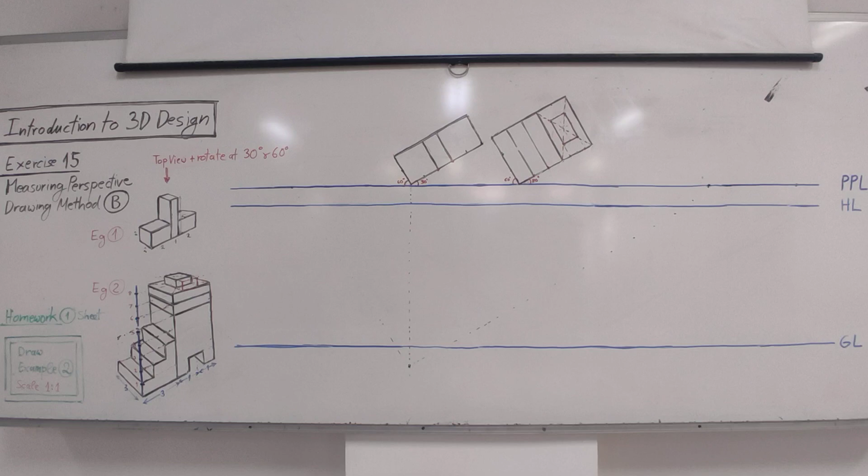Okay, so today we have exercise 15, measuring perspective, method B. Last time we explained method A, which was one of the methods that you use to draw two-point perspective in a highly accurate way. Okay? The measuring perspective method B is another method for drawing in two-point perspective, again, to get a very highly accurate result.

Now, we have two different methods. Both of them are excellent. Both of them can be used to draw the same type of drawings. However, sometimes you prefer one method over another because it's faster, or for example, the teacher asks you for a specific method, or sometimes, depending on the type of drawing, it is easier to draw with one method rather than the other. But both methods can be used for the same type of drawings, and both of them are, as I said, excellent. Give excellent accuracy. Okay? So, both of them are highly important in drawing.

Okay? Today, I will draw two examples. First, I will draw this one, which is more simple, to show you the steps, because with these methods, like method A, we have a specific way of constructing the drawing before we actually start drawing. And this is very important to explain. And then I will draw the two examples, one very simple and the other one also simple, but a little bit more complicated. And we will see how this works.

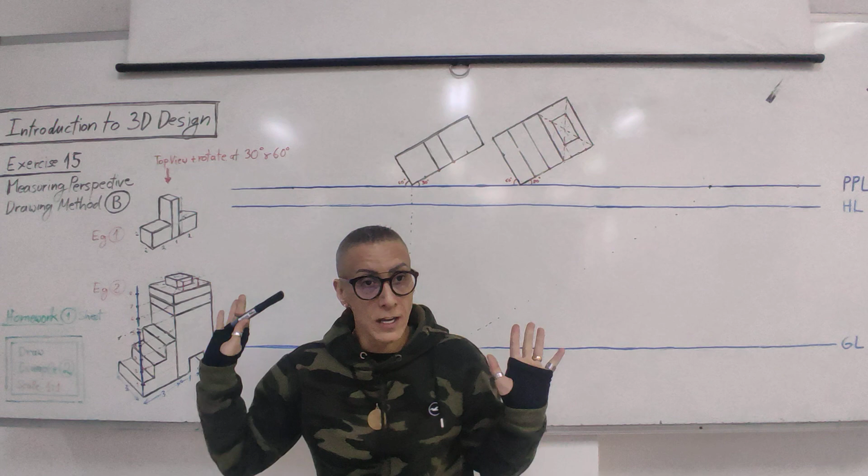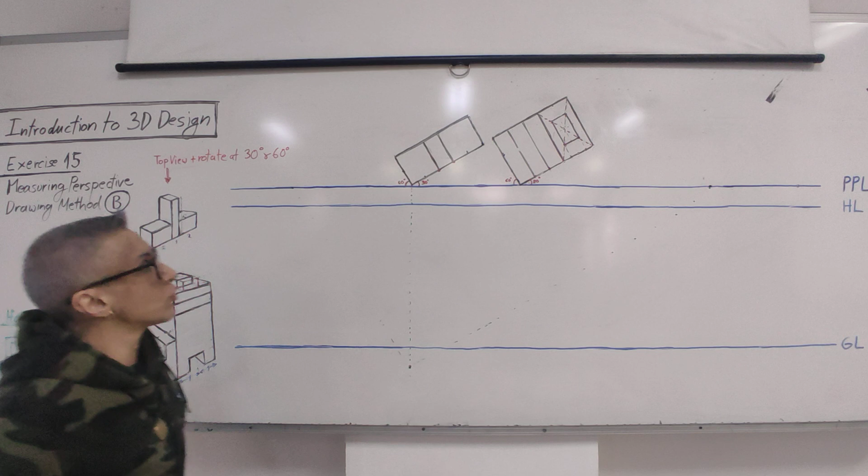Okay. Now, in this method, before I do anything, I need to draw a line called the picture plane line. The first line here, picture plane line. Okay, this is my first step. Then, above the picture plane line, I need to draw whatever object I'm drawing as a top view. Now, first of all here, ignore this one for now, okay? I will draw this first, which is this object. So don't look at this, later I will explain about this. So this object here, we need to draw as a top view and take the top view and rotate it at 60 degree and 30 degree.

Now, this 60 and 30 degree, they can be the other way around. I can put 60 here, 30 here, okay? What will happen is, where I have the 30 degree, because it's less, I will see more of this side. Now, if I put here 60, it will be shifted that way, and I will see more of this side and less of this side. But in this case, because I have here a longer object and here a shorter, I want to show here more. So this is correct and this is correct. It doesn't matter what you put. It depends on what angle you want to show the object. Okay? So 60 here, 30 here is fine. 60 or 30 here, fine. Okay?

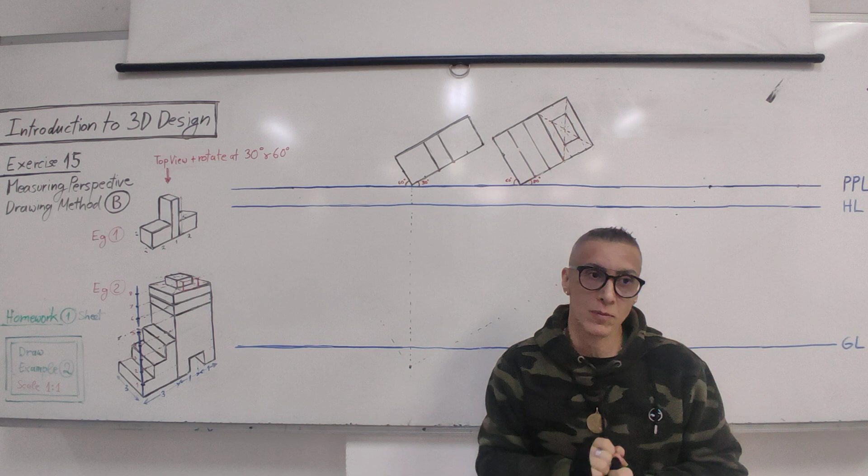The top view of the object needs to be drawn accurately. The top view must be accurate, and then you shift it according to the degrees. This top view must be drawn either with the actual measurements or the scaled measurements. So it depends on what is asked of you. If I tell you, draw this object at scale 1 to 1, it means you will take what you have here and put it on the drawing. If I tell you draw it at scale 1 to 5, you have to reduce. Okay? So it depends what you are drawing. If it's a small object that fits into the paper, you don't need to use a scale. But if you're drawing a building, a very big object, you need to scale it down. Okay, we explained about these things before.

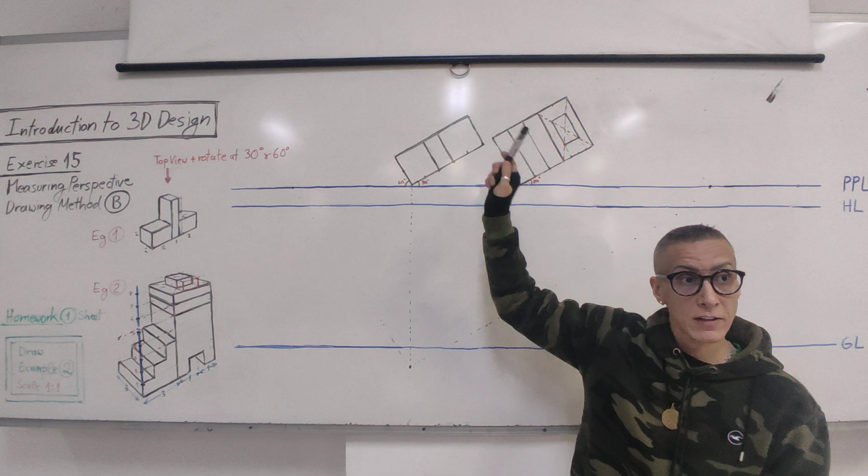So, in our case, we will use scale 1 to 1 in both drawings. So, what we have here, we will put here in the drawing. I already drew the top view, and I rotated the top view. Okay? So, we have here two cubes, 2 by 2 by 2 centimeter, and in the middle we have an object 1 centimeter by 5 centimeter high. Okay? So, as a top view, it will look like this, and rotated. Where is this located again? Above the line called the picture plane line.

Now, after I'm done with this stage, I need to find the station point. Like in method A, we have a station point here, okay? We need to locate it, and it should be at 90 degree again. Now, from this corner, the first corner, which should touch the picture plane line, which is this point here, okay? We will take a straight line down.

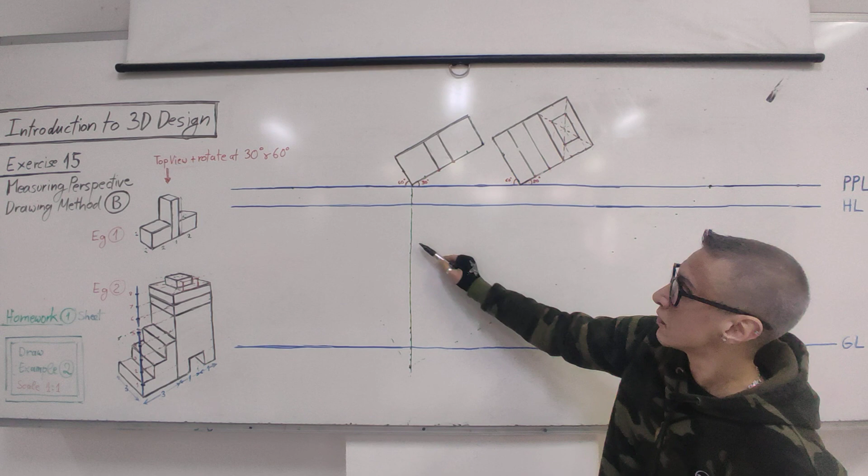Now, the station point can be at several areas. If I put it here, then I can follow this line, parallel lines at 90 degrees, or use my rulers, like last time, to find the 90 degree station point. However, with this method, you need to apply something additional. You need to measure from here.

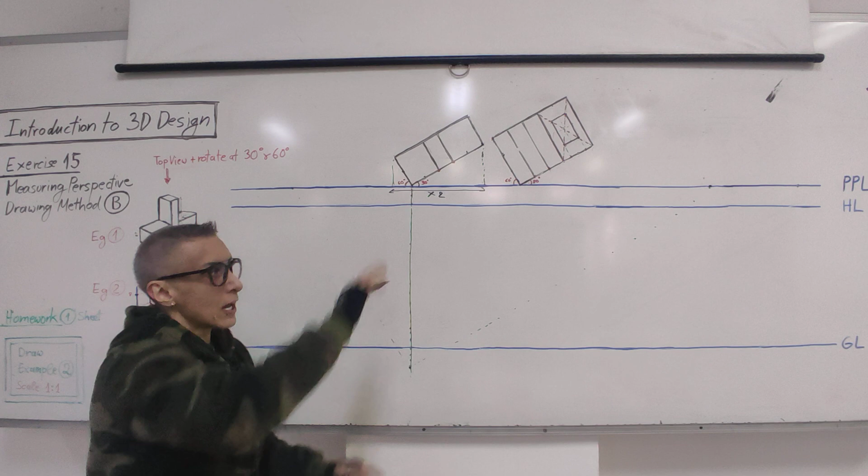So the object, this object, for example, if you put a line down until the picture plane line, and from here, straight line down, of course. So from here to here, how much is the distance? You put it here 2 times. So this distance times 2, and there is the station point. So you measure this distance, put it times 2, and put the station point location.

This is just to give you a very accurate drawing, so it doesn't create views that are not very nice looking if you put the station point at another location. So if we have this object, for example, the same thing. You put the points down and you measure the distance. Some objects can be long, short.

Just remember not to make a mistake. Don't measure this or this. Measure the distance when you put these lines down; this distance is important. So this distance times 2, we put the station point wherever it's located. And it should be located on this line.

Now, once we find the station point, we need to put the other 2 lines, which should be crossing each other at 90 degrees. So this line must be parallel to this line. This line must be parallel to this line. Or you can just use your rulers like last time.

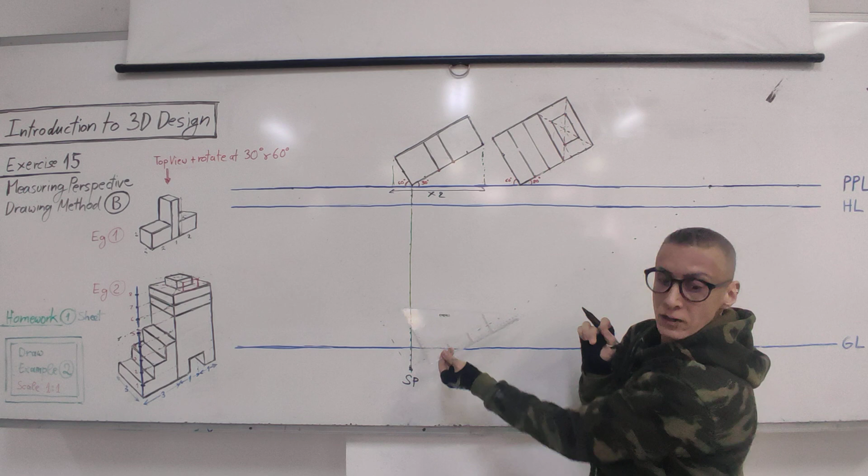So for example, here this must be parallel. This edge you can put it down, and you can go down to the station point. Continue this line. Or you can use this ruler again. Put it down wherever the station point is located, and then line, like this, or just make sure they are parallel to each other. So let me draw.

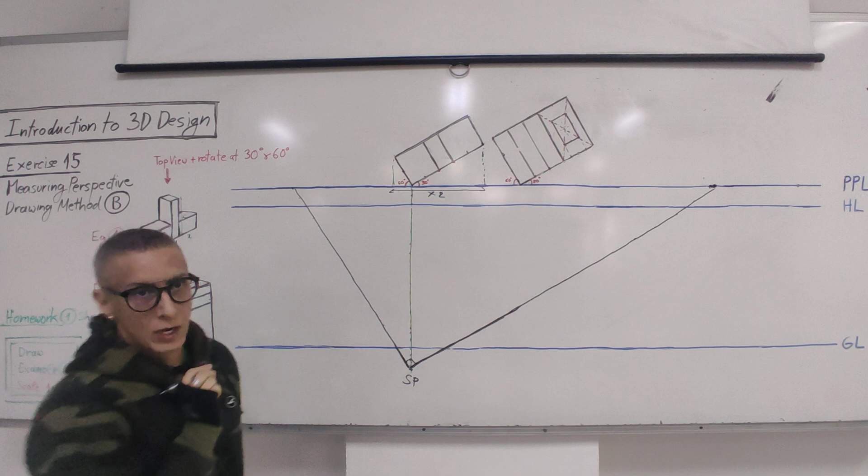So this should be what? At 90 degrees. And these lines parallel to these lines. Very important. Now, where these 2 lines cross the picture plane line, we will name this P1 and P2. Then, underneath the picture plane line, you need to draw a horizon line.

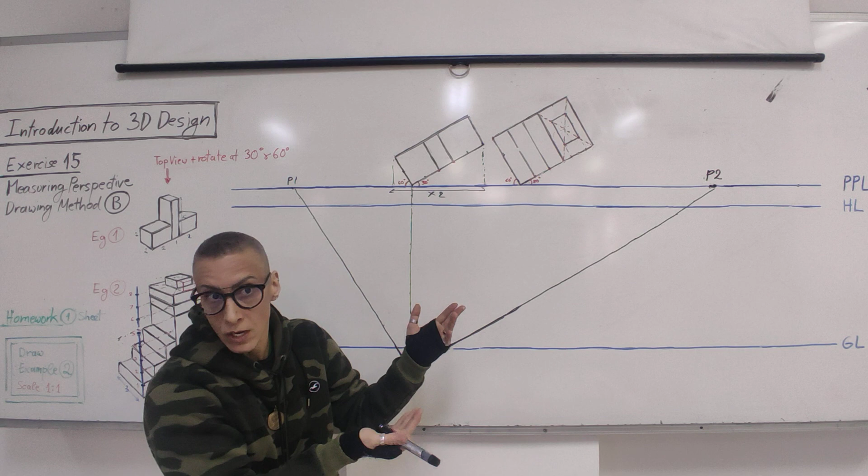Now, this horizon line doesn't have to be very close to the picture plane line, but you have to understand that where you place it will affect the drawing. Anywhere you place it, the drawing will be from a different angle of view. So the horizon line must be below somewhere, and then you will take from P1 a straight line down. This will be vanishing point 1, from here down to touch the horizon line. This is vanishing point 2.

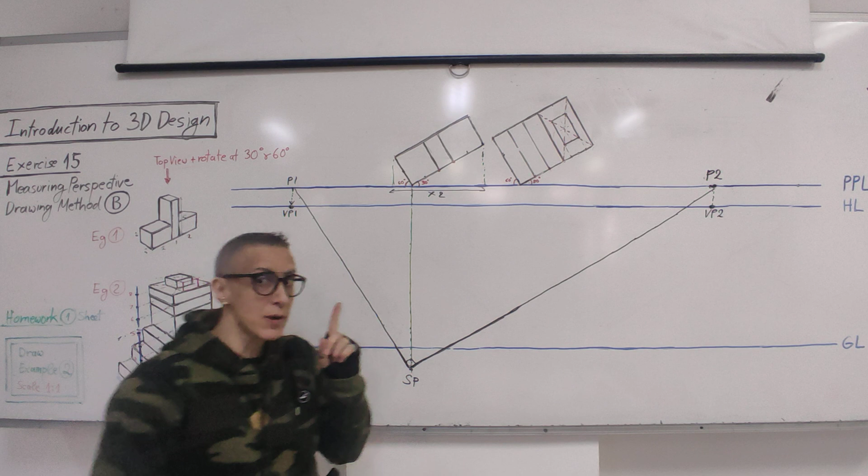Now, we need to also decide where the ground line is going to be located. Again, it can be located in several places. But remember what I said last time? When the ground line and the horizon line come close to each other, my angle of view will be different. So sometimes I might be looking down at it, sometimes up. It's not wrong. It's all correct, but it will affect the way the object looks.

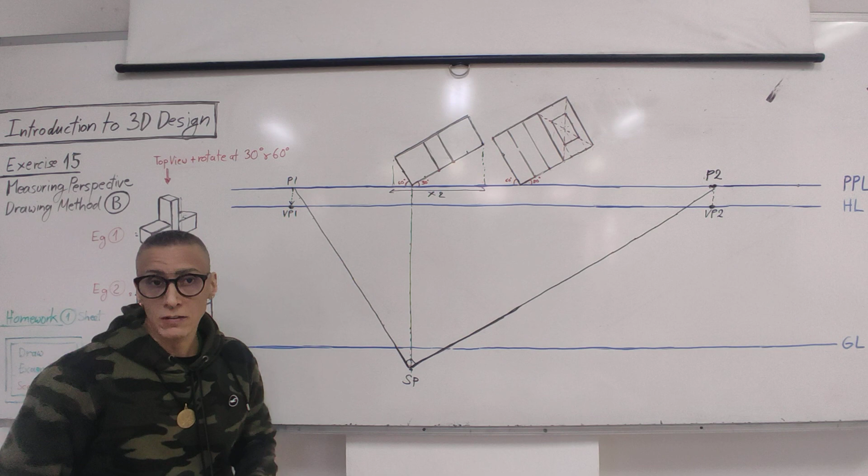Which is normal. So if you draw it somewhere and you don't like the way it looks, you can move it up or move it down and see what happens then. With the drawing, you have to experiment and then decide what you want to do. So we decide the ground line to be in this location. In this case, my horizon line is here. I have here sufficient space to draw.

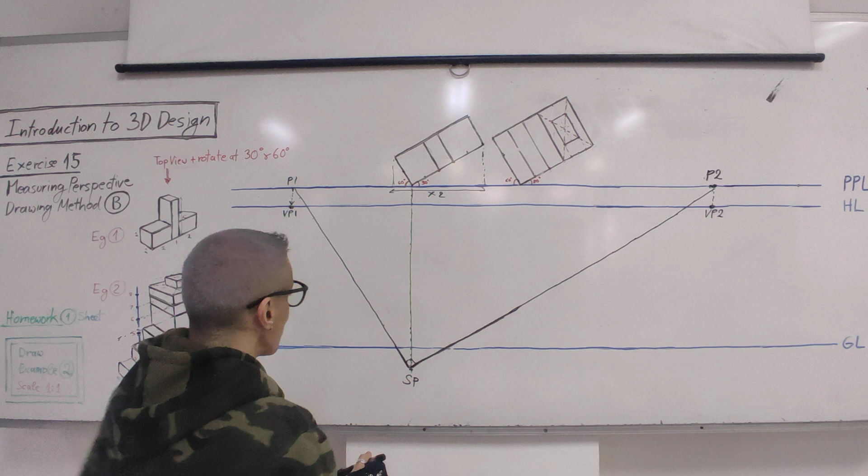And so, for example, if the object goes above the horizon line, part of it, you're looking up at it. But I'm going to try to draw the object as I'm looking down at it. So I need sufficient space here between the horizon and the ground line. Now, where the ground line crosses this edge here, this is the starting point, 0, like last time. And we will put some measurements on this line.

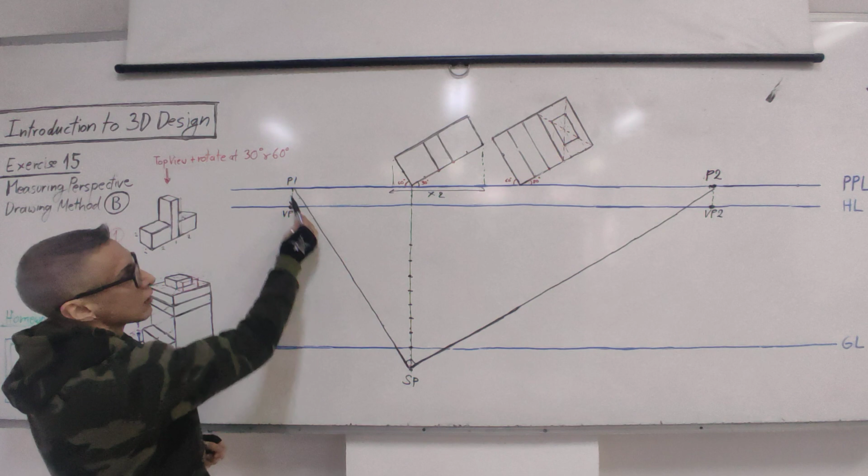So, some measurements that we will need. Now, from the starting point here, the 0, we will take these lines where? To the vanishing points. Be careful not to take it to the picture plane point. To the vanishing points. So, from this starting edge where the two lines cross, the ground line with this line.

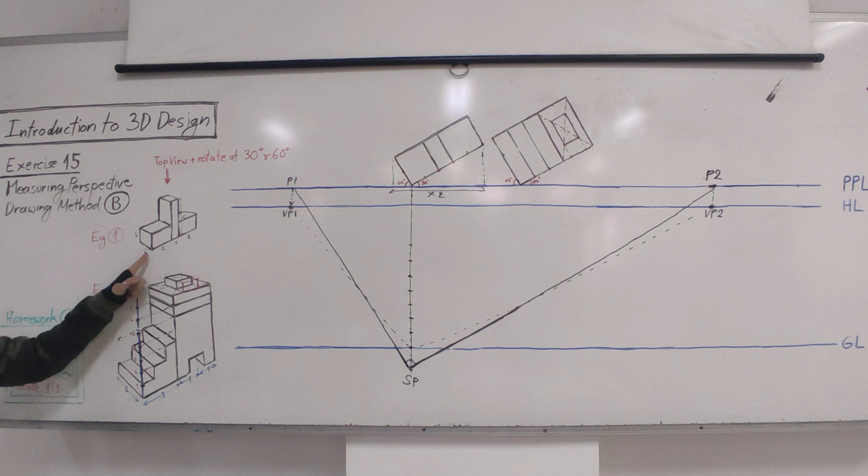Now, we are drawing this object. Remember, the first cube, the first edge here is 2 centimeters, 2 by 2 by 2. So, 1, 2, this is here number 2. So our first edge will be here, this one going to the vanishing point. Just 1 second. So at 2 centimeters, this will be the height. I can also take this immediately to the vanishing point.

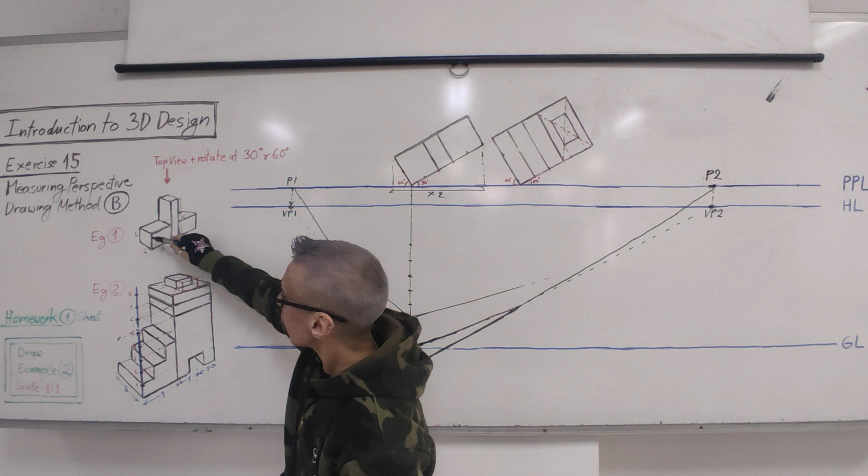Should go to the vanishing point. Okay, now, how do I find the location? Now this line, we already know it, but how do we find this line here, this line, and this line? Now, here is what is new about this method. So,

to find these, you need to look at the top view, and you need to look at the points where lines intersect. For example, this point here is this line. This point is this line, and this point is this line here, okay? So, we need to find the location of the points here, and also this point here. After that, it's very easy. We just put the lines up and continue the drawing. How do we do that, okay?

Something important. Now, we start always, because sometimes you might have a lot of lines that cross each other, a lot of points. You start always with the first 2 lines, these 2 lines. The main object points that are at the main lines, this line and this line. So, this, and this we need to find.

These we don't need to find, because once we find these, when we take the lines to the vanishing points, they will appear. This point here, we don't need it, because when I take this line to the vanishing point, this to the vanishing point here, they will cross, and this point will appear on its own, okay? So we always start at the front, and then we move back.

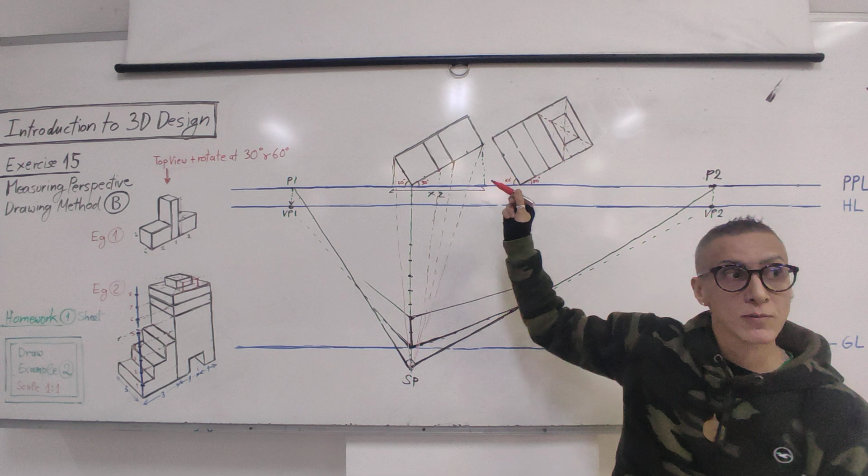So, all the points that you need to find, you will take them and put them exactly to meet at the station point. Now, look carefully and mark. Where do the lines intersect with the picture plane line? They intersect here, and here, and here, and here. Okay? This is very important. Now, to find this line, this is the point where it intersects the picture plane line. From here, I take a straight line down.

It must be straight. If you just use any ruler without a T-square, the line might become a little bit shifted, the drawing inaccurate. You must use the T-square and put the ruler on top. Make sure the lines you take down are perfectly straight. Any small mistake in this construction, because some of the lines are very close to each other, and some points can be ½ millimeter next to each other in some drawings. So if you make any mistake, the result here will also look wrong. Okay? So just be careful.

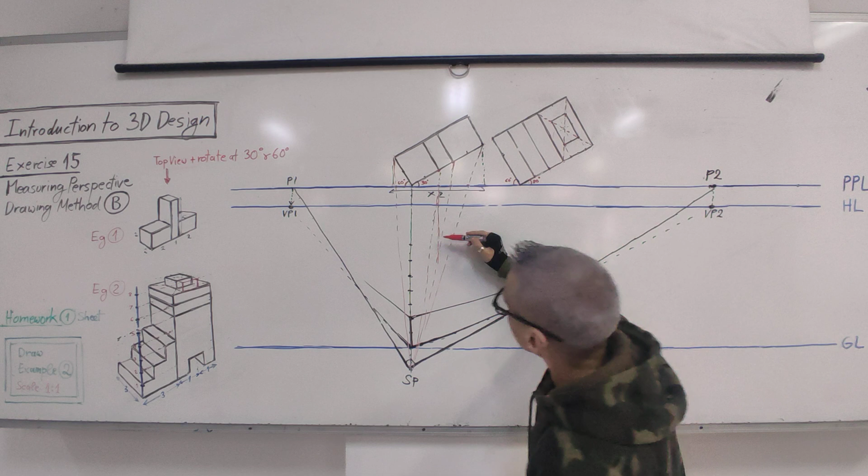So from this point here, where this point intersects the picture plane line, we take a straight line down. The straight line down, you see from this point? And this is basically the line we need here, where it crosses these two lines. Now the next one, this line, how do we find it? The same thing. We already found the point on the picture plane line. We put a straight line down. Okay, here is the line that we want.

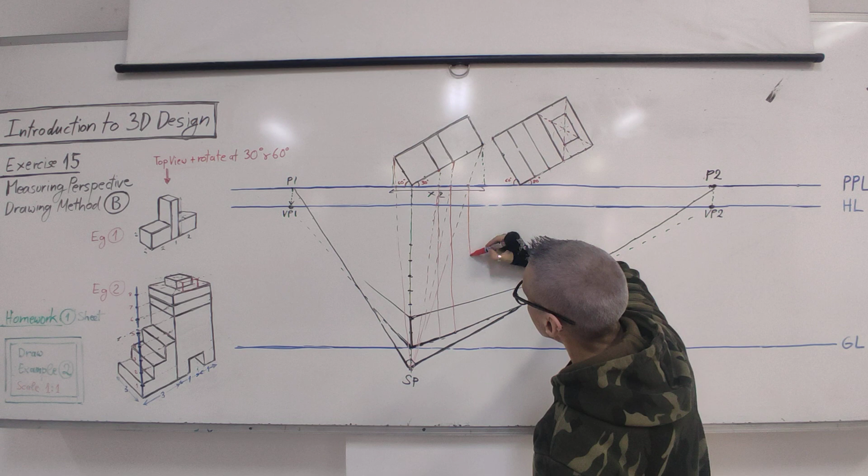The final line, this line, which is this one here, this point crosses the picture plane here. We put a straight line down. Here is the location. Now we're finding the location, later the heights, okay? We need now the location. So this is the location. We already have this cube here. This line we need, and this line we need.

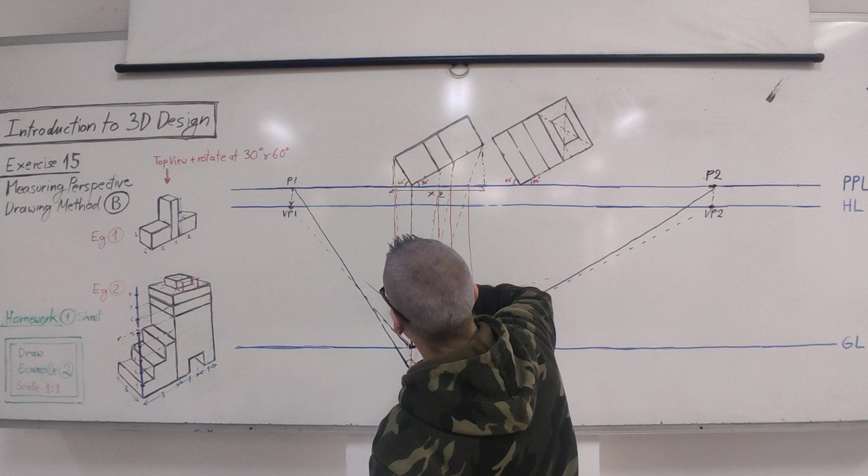Now, from this side, what happened, okay? Here the point crossed the picture plane, so I need to take a straight line down from here, until it crosses these two lines. And this is basically the other side of the cube that we need.

Now, to continue the drawing, we will take these 2 points to the vanishing points, okay? To the vanishing point. And this one to the vanishing point. Okay. Now, this is a 2 by 2 centimeter cube, 100% should be correct.

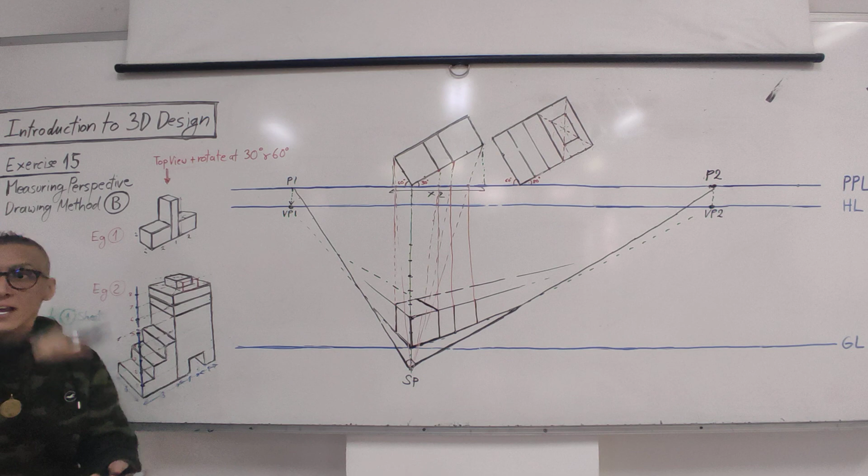Now, this object here is actually 5 centimeters high, okay? So how high to put it here? Well, we will extend the lines. We extend the lines up and we go back to the first edge. So 1, 2, 3, 4, 5. At number 5, we take to the vanishing point, where it will intersect these two lines. This is what we need.

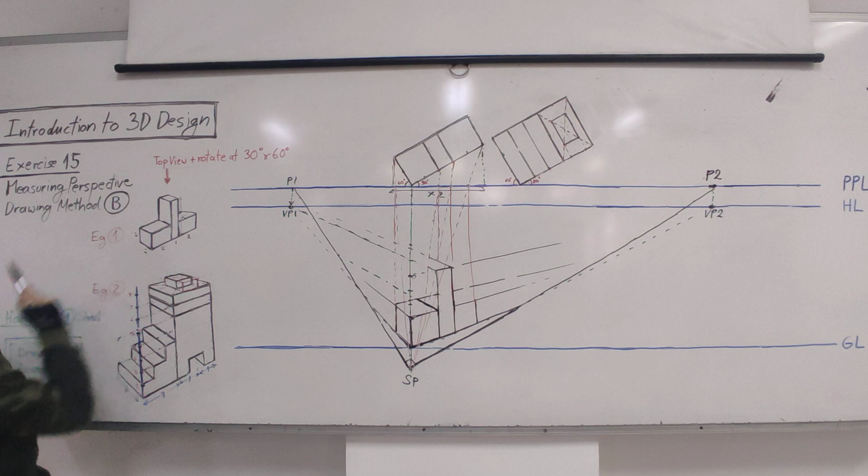Okay? Now, this here will be deleted. Now, from these 2 points to the other vanishing point. Now, this object ends where the cube ends. So until the end, here, meaning this corner. So I will put this line up.

So, where it will intersect this line, here is the location. From here, we will take to the other vanishing point, and this is basically the object that we need. Now this cube, we already located this face from this point to the vanishing point, to draw this side.

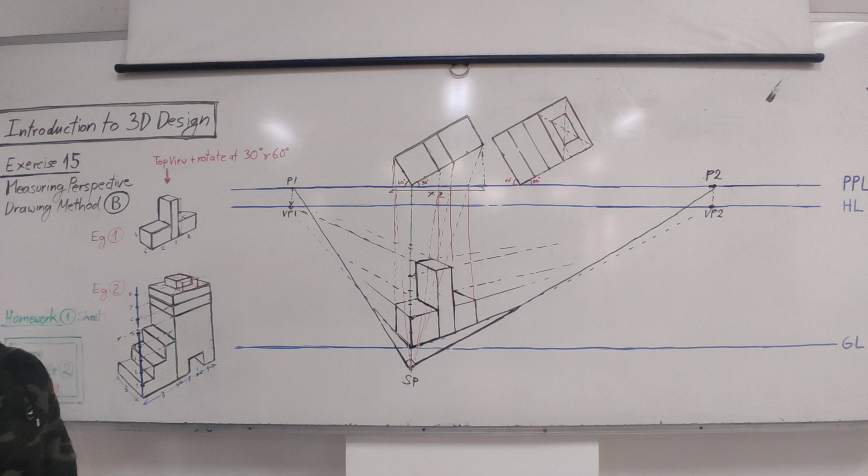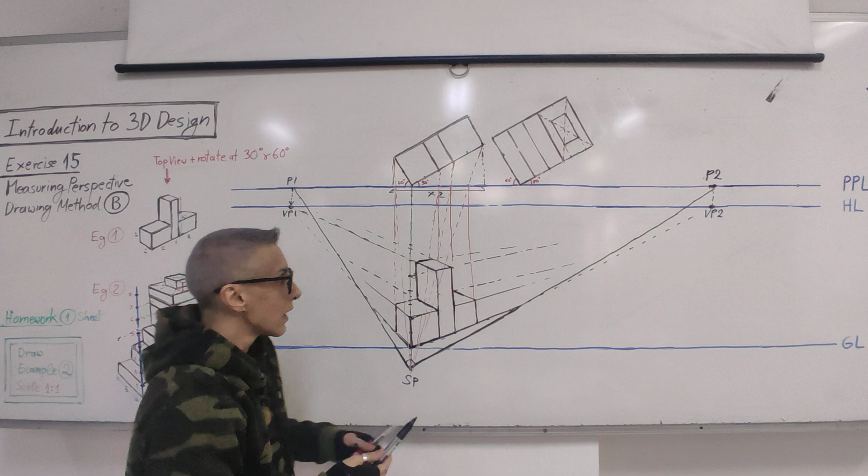And this is basically it for this drawing. We have in this type of drawing measurements on the first edge to find the heights, but all the other point locations we find from the top view, which is above the picture plane line, by connecting lines to the station point, seeing where they intersect the picture plane line, then putting straight lines down to see where they intersect these two lines, the base of the object. Then just take straight lines up. The rest is very easy.

So this is the first object. I will now delete everything and we will draw this object, because this object will have a different station point, a different location and measurements, and the vanishing points will all be in a different location. So I will delete everything now.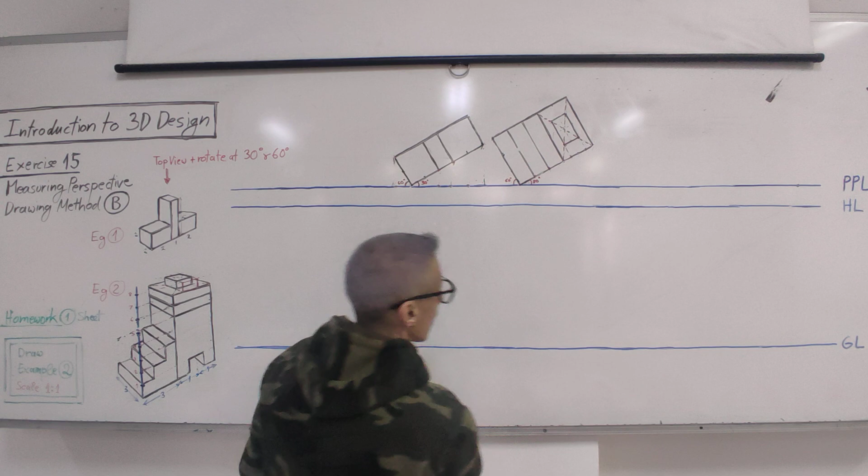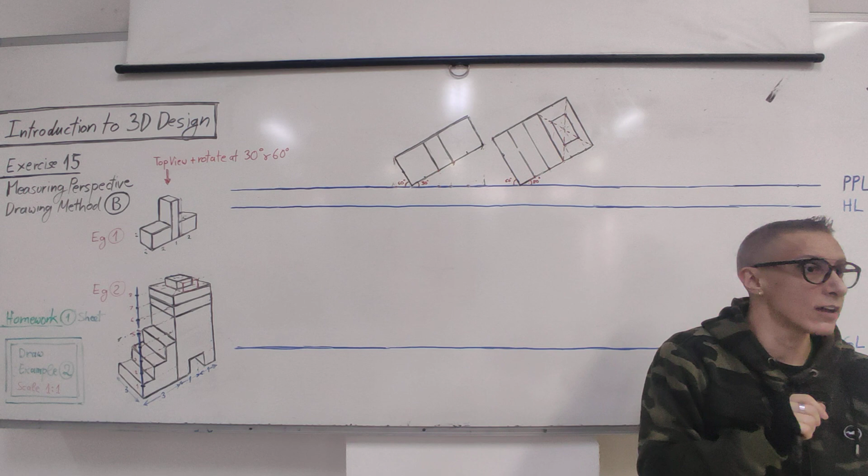Now we have this object. Again, we need to draw its top view accurately according to scale or real measurements, and then take the top view and rotate it at either 30-60 or 60-30, depending on which side you want to show more. So this is the top view of this.

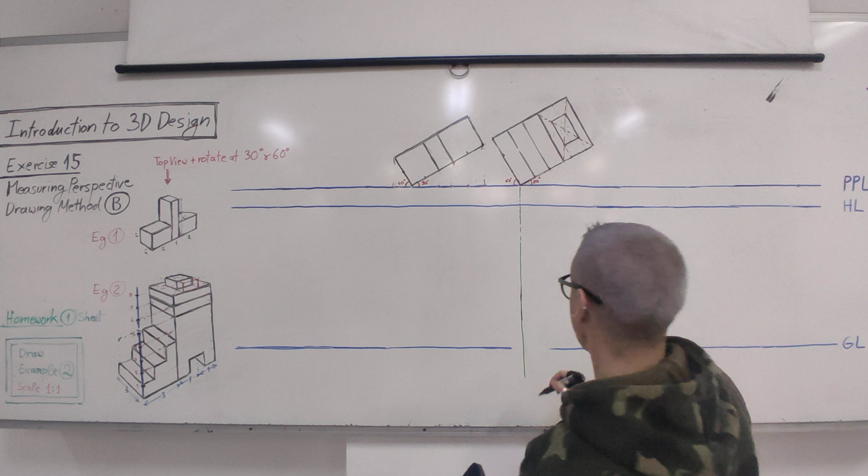Now, from this corner that touches the picture plane line, again we will put a straight line down. So we put a straight line down.

We need to find the station point, where again we will take the distance from the two widest points. But to do that correctly, we need to draw straight lines down until the picture plane line. Measure this distance and make it times 2. So this distance you take, you put it here 1 time, 2 times. Wherever it reaches, this is the station point.

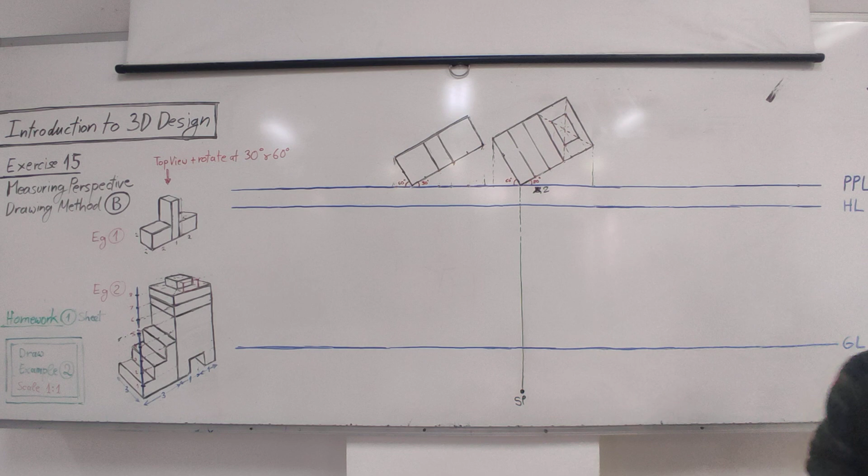Now the next step is to find the 90-degree intersecting line. So this line must be parallel to this line, which must be parallel to this line. You can use the rulers to help you in this. Make sure this is parallel to this, not like this - like this. And you can put it down until you reach the station point.

And then just continue with the lines, until you touch the picture plane line.

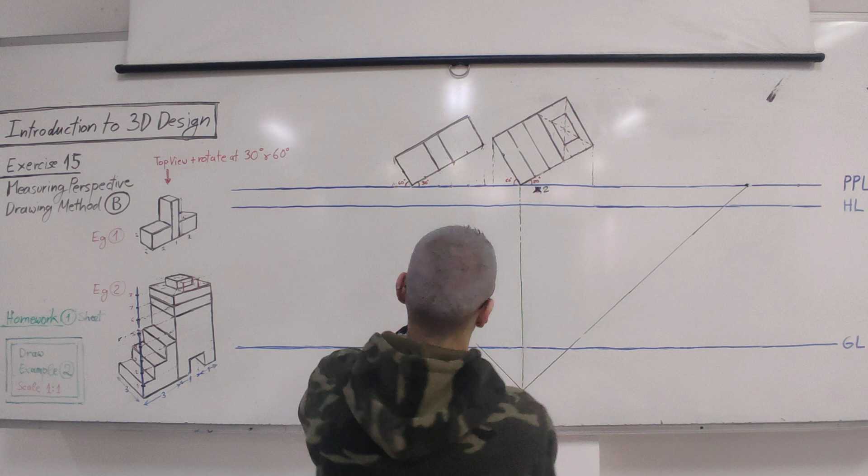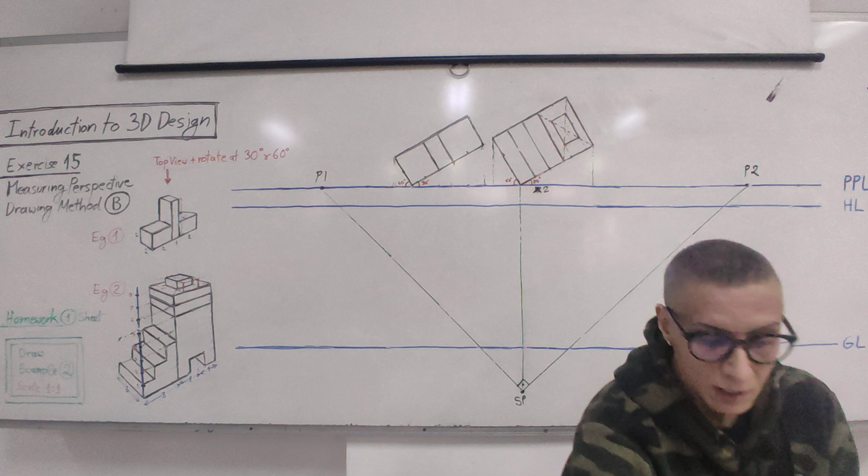So this will be P1, this will be P2, this will be at 90 degrees. Remember, if you use this ruler, it will be exactly in the middle. But you can also use this ruler - then the 2 points, one will be far away, the other one will be closer, and you can rotate it from this way also. Important that this be 90 degrees.

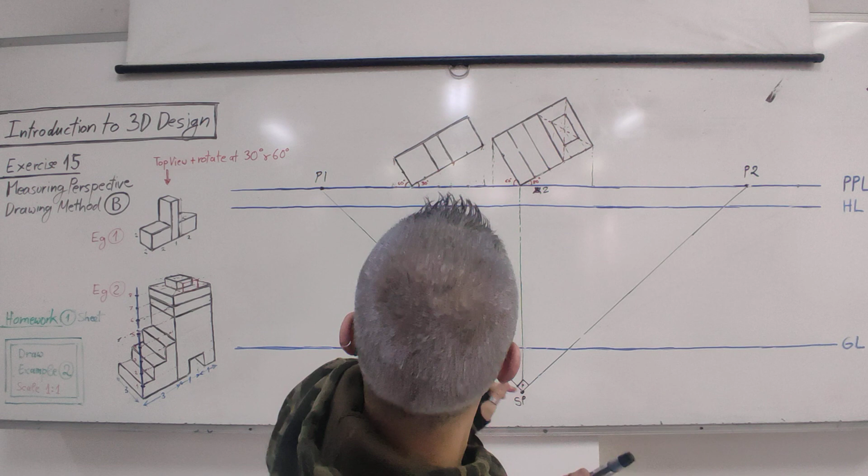Now, this drawing is not very accurate - it's just a visual, because this line and this line need to be parallel actually. So in fact this one is parallel. I cannot use this ruler, I have to use this ruler because I have 30, 60 degree here. So let me fix this point here, just to make it a little more accurate.

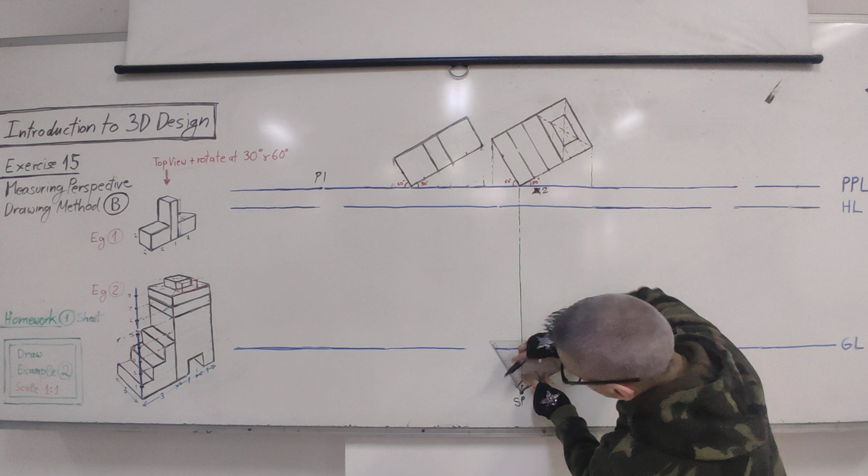So this one here. Let me remove this one as well. You can use only this ruler for this drawing because we have 30-60 or 30-60 here. So I will do it again using this ruler. Put it here, this one on the line, put it down until our station point. Then put the line. So now they should be parallel to each other.

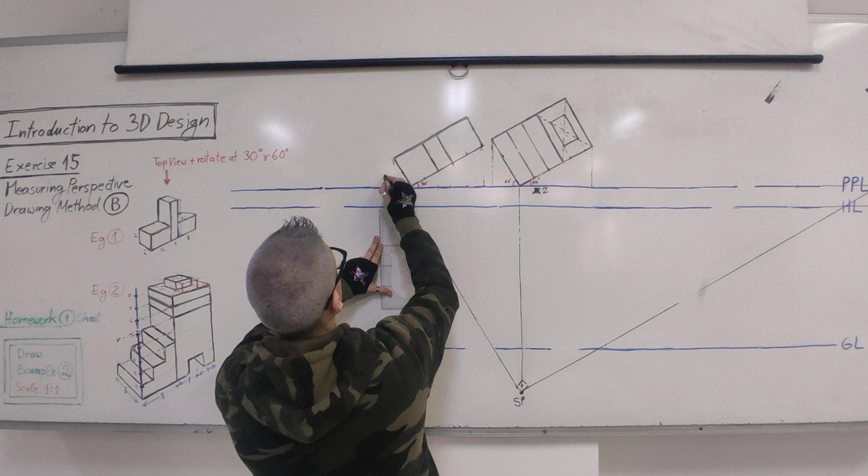I will just use the ruler because these are very long lines and not to make them all shaky. So P1 will be here, P2 will be here.

So this distance times 2, this is the station point, this is a 90 degree. This line parallel to this line parallel to this line.

Now what do we do? We have the ground line selected. I will use the same ground line location. This is our ground line. It crosses this line at this point, so this is here the 0 - the starting point for this point, the starting edge.

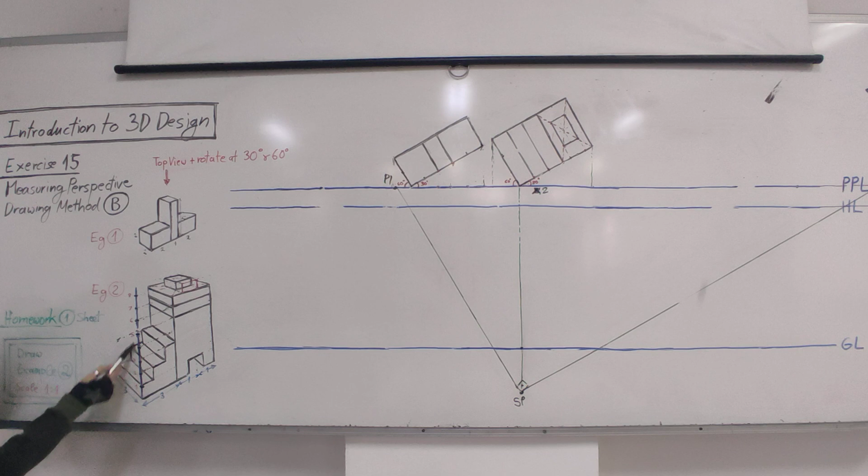So what do we have here? This is the starting edge. So we have 1 centimeter here, stairs, 1 centimeter, then another one, then another one. So the first one is 1 centimeter. Let me put a ruler first - 1, 2. So at 1 centimeter, we take from here and from here to the vanishing points.

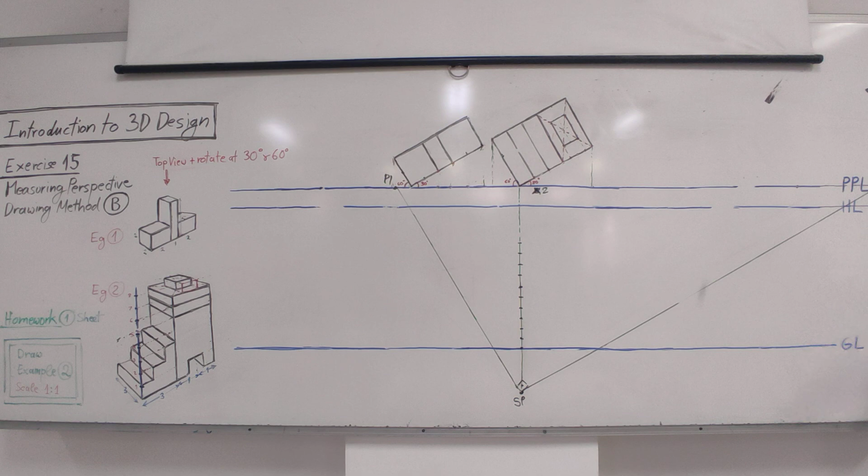To the vanishing points - where are our vanishing points? We need to put them down, down here until the horizon line. So this is our VP1, this is VP2. Be careful not to connect to the picture plane point - to the vanishing point. So from the first edge we take to the vanishing point.

The vanishing point. Okay.

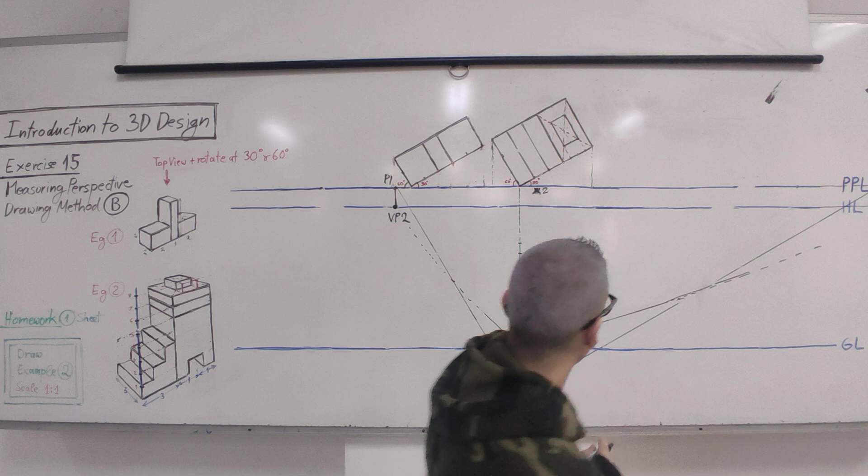So they should go and reach the vanishing points, and we said that the first object ends at 1 centimeter. So this is 1 centimeter, so from here also to the vanishing point we take, and from here to the other vanishing point. Okay, continue.

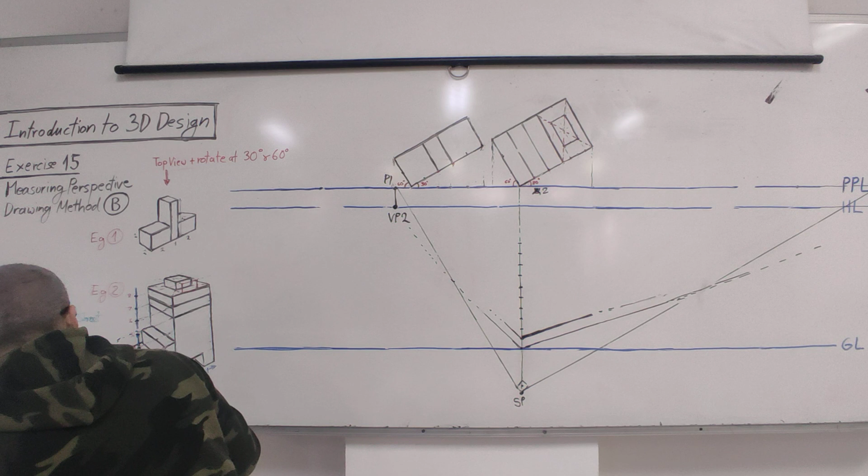Now, from this point, we took this line here to the vanishing point, and we took this line to the vanishing point. Okay, great. How do I find this line here? This line, this line, this line, this line, and these two lines. So we need to find their location here on the bottom part, on the ground.

We need to find it, not in the air, here. So if we put straight lines down here, straight line down from here, so this point, this point, this point, this, and this we need to find. From where? Using the method that we just explained. Where are they located here, these points? Here, here, here, here, here, here. These 2 points are for the opening, okay?

So you need to make sure that exactly the measurements are correct here of the top view. Any mistake here, everything will be wrong. So from this point, which is this point here, you take where? To the station point. So I will take all of them to the station point now, and later find their location.

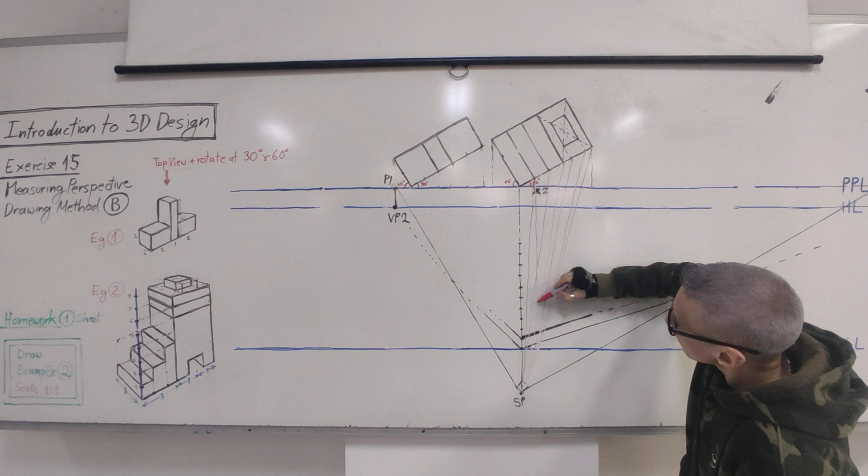Or I will just do it freehand. So I will put a straight line down. Where it will intersect this here, this is what we need. Then the next one. Oh sorry, this one here. Be careful not to, by accident, take from this point. From this point, you need to take down. So located here, from this point down.

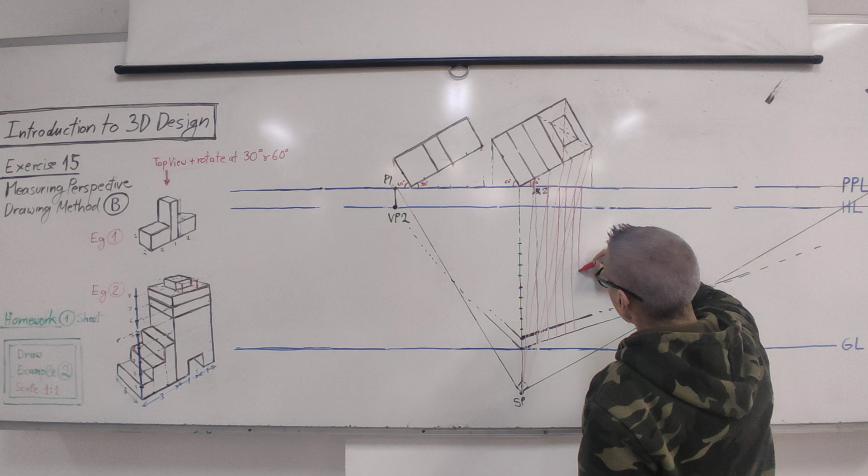So, once you have this top view and the measurements are correct, just you find the points. You don't measure anything else. You just find the points to the station point. Then where they cross the picture plane line down, automatically the object will be correct.

Now what we have here, we find the location. So we found where this point is located here, this point, this here, this, and this. Now here we don't have a line, so we need to put it up. So we don't need this line, but for now we will leave it.

Now this line is at another 1 centimeter. Here we started with this is 1 centimeter, then we have the stair, this one is also 1 centimeter, but from where do we know? From the first line. So this is here 1. At number 2, you take to the vanishing point. So you take here to the vanishing point. Okay, this is what you need.

Now, from here you have another stair up. So we found now which one? This and this line and this line. This we need to find, this point. This comes at number 3. It's the third one. Okay, so 1, 2, 3.

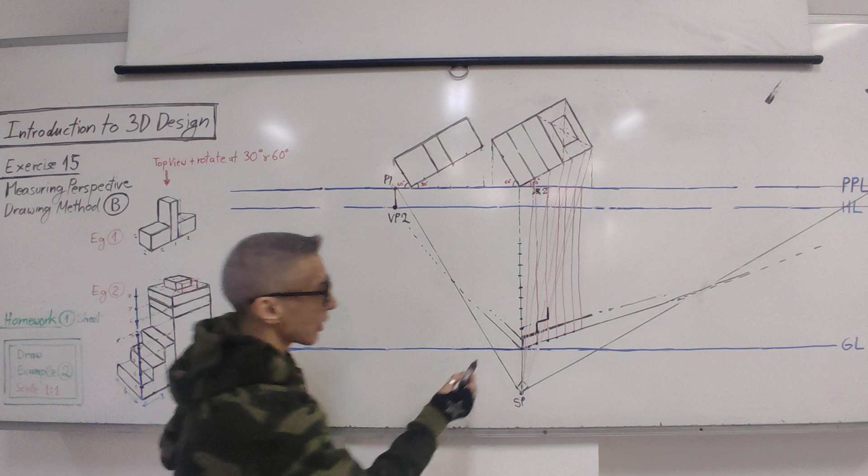From number 3 to the vanishing point, where it will intersect here, to the vanishing point. This is the line we need. Until where? Until this line, okay?

Okay, now we put up again. The next will be what? The next will be this line, up, the long one. Now the long one is how much? 7 centimeter. From here we need to count. 1, 2, 3, 4, 5, 6, 7. So from number 7, we take to the vanishing point.

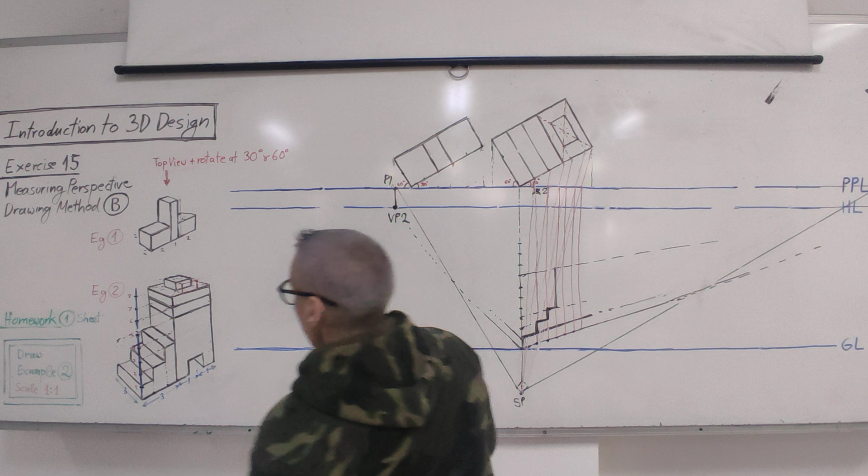To the vanishing point, and we put this line up. Later I will draw this detail. Now the final line, which is this line here, this point, I will put it up. Now, from number 7, this line that we already go to the vanishing point, it will intersect these two lines here. So let me remove these so we don't need them here.

To reduce the number of lines. Now we need to take from each of these points to the other vanishing point to continue this side of the object. So this line we already have it. This line we already have it. But okay, we have a problem. Where does this end here?

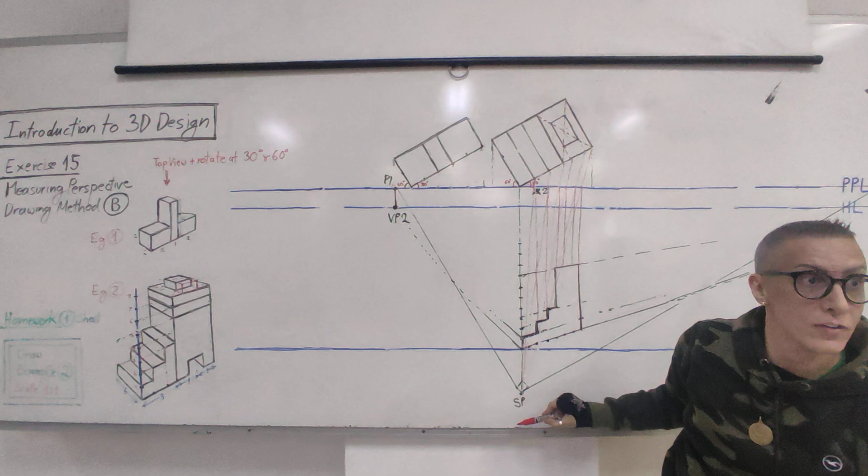Okay, so we need to find this point. This point. We still haven't found it, so we take this to where? To the station point, okay? To the station point.

Okay, now where this intersects the picture plane line, from here we will put a straight line down. Straight line down. Until it intersects these two lines. This is what we need here.

Now, from here, okay, we continue. From here to the vanishing point again. From here to the vanishing point, to the vanishing point, to the vanishing point, all of them to the vanishing point.

Now, from here to the other vanishing point, to see where this will intersect. Where they will intersect, you put it up. Here to the vanishing point. Where it will intersect, you put it up. Then, from here to the vanishing point, where it will intersect, you put it up.

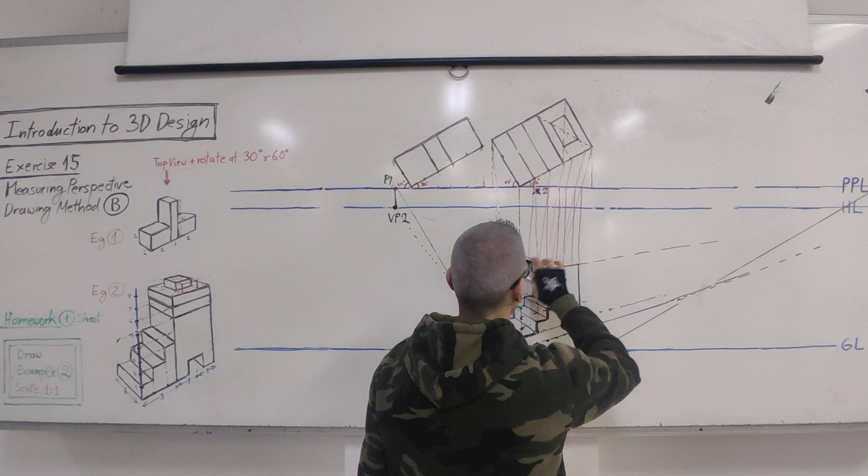So now, from this point to the vanishing point, and this line up, where it will intersect, here is what we need, here is the height. And from here, from this point to the other vanishing point, and from this point to this vanishing point.

Finish the top surface of this object. Now let me clean it up a little bit here, because there are too many lines. We still have this detail to draw here.

Excuse me, can you be silent, please? Who is talking all the time? Now is the time to try to listen, okay? Not discussing.

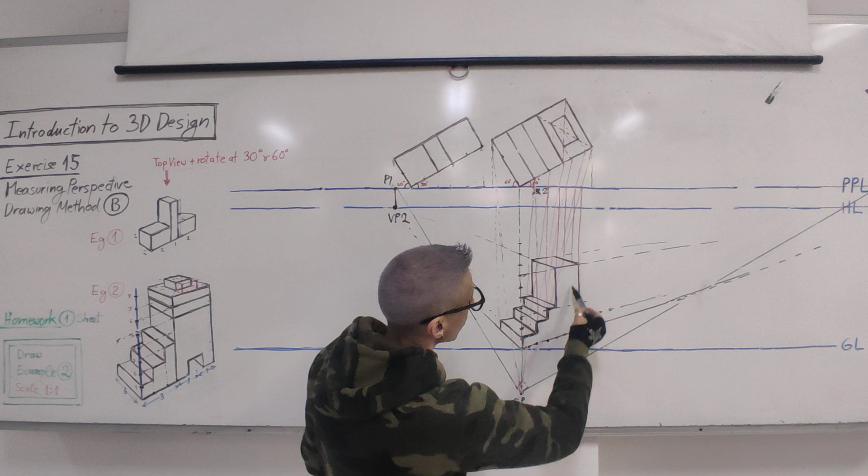Is it missing here still? This detail. Okay, now this detail we already found, this is an opening, okay? We found this point and this point, which are where? This point, let me check again, this point and this point, this here, this is the first one, this is the second, here, this, okay? So these 2 points are the opening.

Now I need to put lines up from them until where? It's 1 centimeter up. 1 centimeter is here, 1 centimeter, okay? So this line, once you take it to the vanishing point, it will intersect these 2 here. And this is the opening.

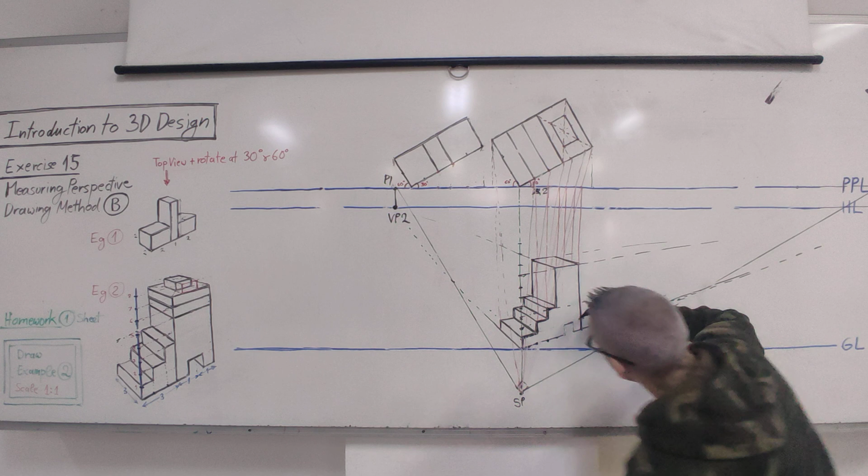Now you can open it. Let me make it a little more clear. This is the opening, and because it's an opening, from this point, you need to take it to the vanishing point again, because you can see this part of the wall over there, because it's opened, okay? So this goes to the vanishing point.

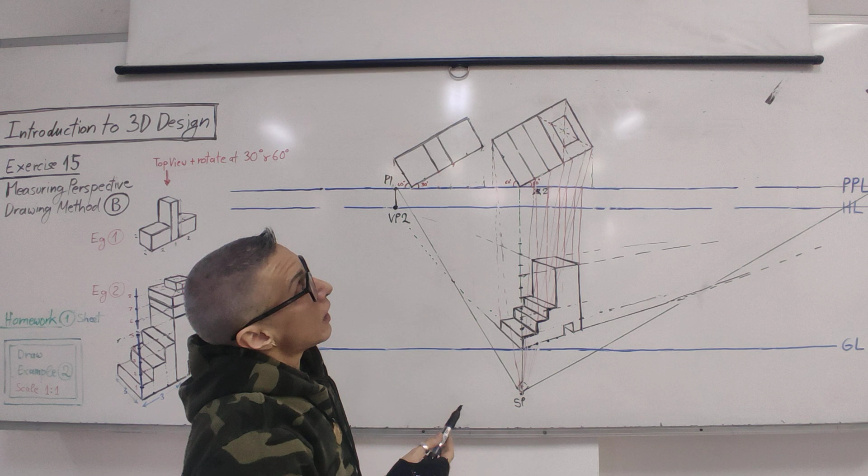Now, the final detail on the top. We have this object here that comes in the middle, basically, of the surface. So, as you can see here, if we look at this surface and put the diagonals on it, we have a rectangular surface with 2 diagonals.

There are 4 points located on these diagonals. A point here, a point here, a point here, and a point here, okay? How do we find these 4 points? Well, they are on the diagonals. So the first step is to draw the diagonals. Let me clean it up here a little bit so we can see better.

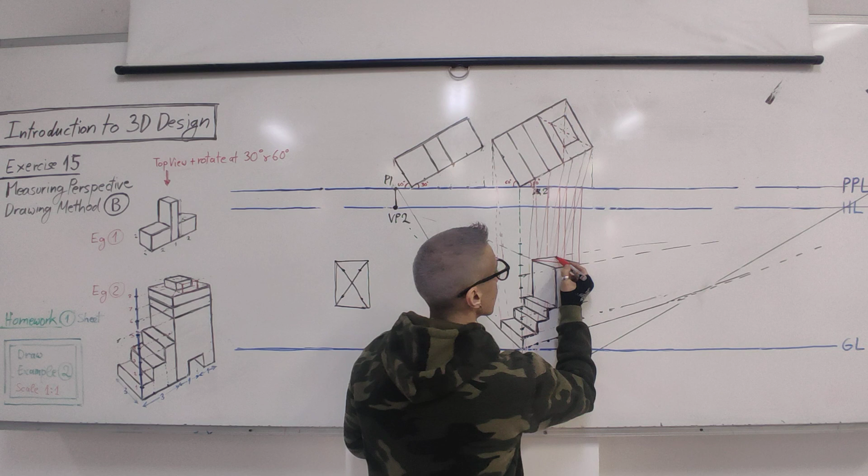So we need to draw what? The diagonals, because the 4 points lay on the diagonals. Once we have the 2 diagonal lines, it's easy to find the 4 points, because we will just take the points that are close to us, these 2 points, and take them where? To the SP point.

So this point we will take down to where? The SP, okay? Where it will intersect the picture plane line, okay? We will mark it. Then the other point, the same thing. We will take it down until the SP, okay? Where it will intersect the picture plane line, okay? We mark it. Now, straight lines down.

So this point is located on this diagonal, which is this one. Here is the point. We will take it straight down, straight line down, until it intersects this line at some point, okay? The same thing we do with the other one. So this is the point, we take a straight line down until it intersects the other diagonal.

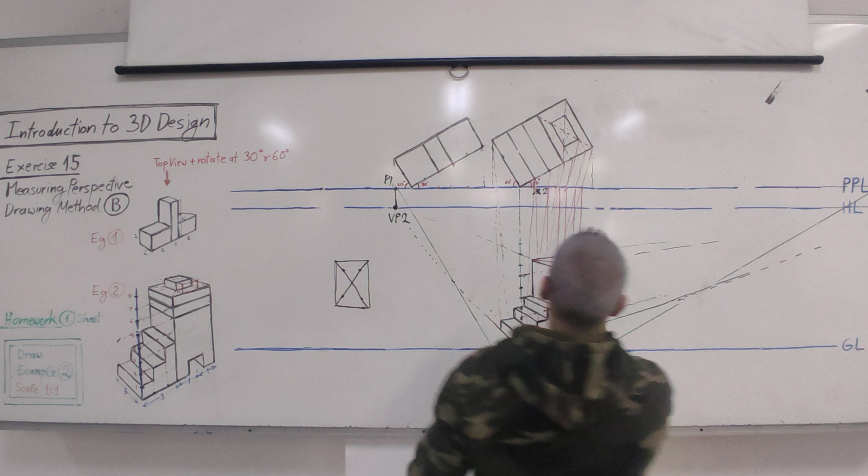Now we have the 2 lines perfect, okay? The 2 points. From this point to this point we connect, okay? We know their location. Now we don't need to find these 2 points, because from this point we will take it to the vanishing point, okay? And it will already intersect this line. From this line to the other vanishing point. And these 2 should also connect and go to the vanishing point.

So it should be located, for example, here, okay? Be very careful with the small measurements, okay? This is still an easy object, but when you have small measurements, any mistake with the lines or the location of the points will create a wrong result here.

Now, from each of these 4 points that we find, okay, we need to put lines up. Line up from here, line up from here, and the back one.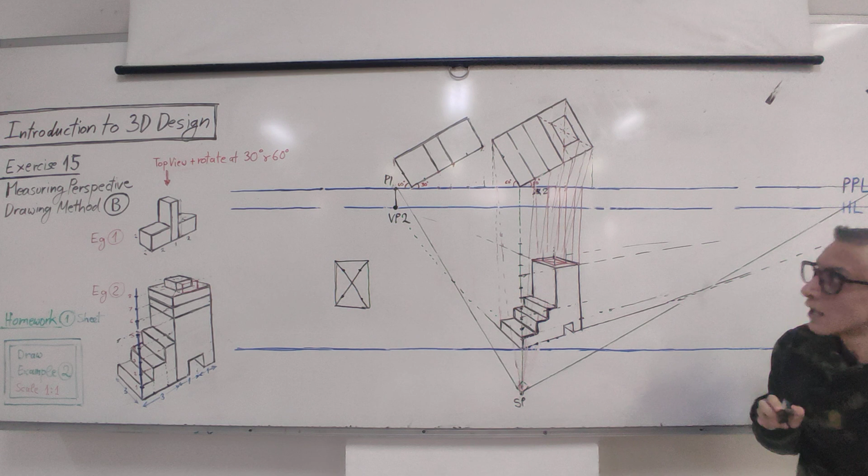Okay. This should be 1 centimeter, so at number 8. But here I want to remind you, because some of you will do this, okay? You will take from number 8 on the first edge, and you will draw a line going to the vanishing point, and then that's it. You will connect and say this is the height, connecting the line immediately to the object.

But don't forget, this object does not lay exactly above this line. What you are finding is an object inside. So there is a space here or a space here. So you cannot find it in one step. From number 8, immediately connect and do, no. So from number 8, when you go to the vanishing point, you're actually finding this surface here. You're finding exactly what is here, but located here, above this line.

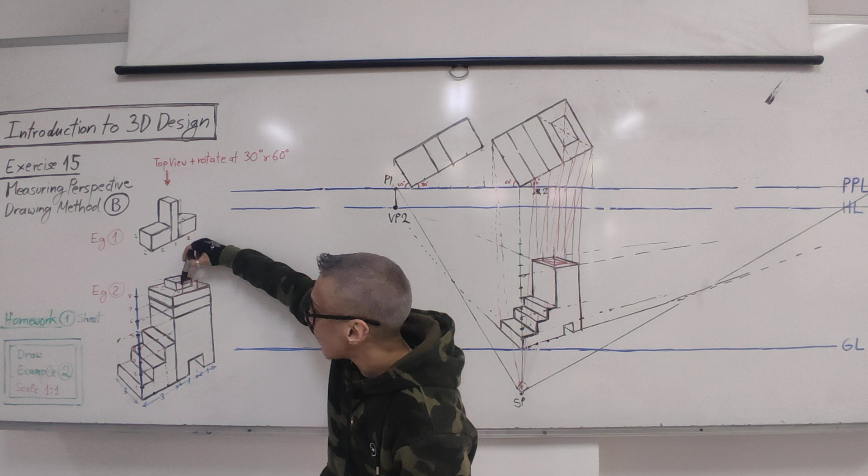The next point is to take these 2 points to the other vanishing point, then see where these 2 lines will intersect, which we put up here. So you need 2 steps. I noticed that some of you still did not understand this, did not pay attention. So, at number 8, where is number 8? 1, 2, 3, 4, 5, 6, 7, 8. This is number 8 here. We take to the vanishing point.

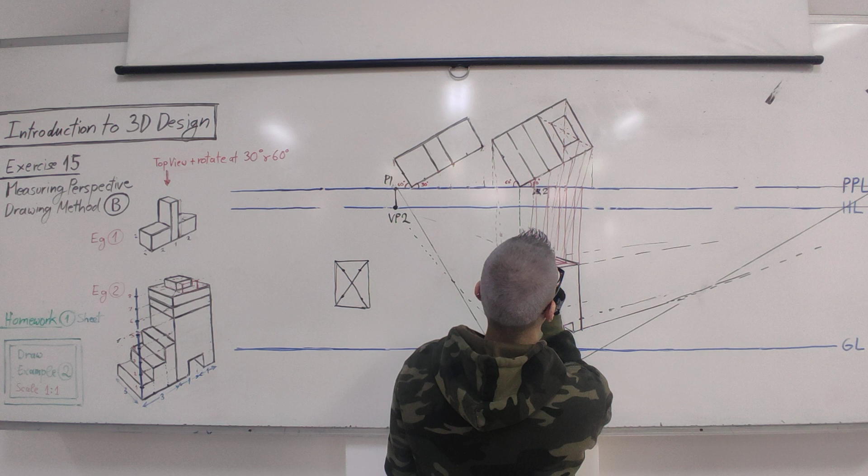See, this is where the mistake happens with some students. You immediately connect this line with these 2 lines here and say this is the height. But this is not the height. This is the height of the object that lays on this line. Okay? Everything that lays above this line, or above this line here, you can find it directly. But anything inside, you cannot find it directly.

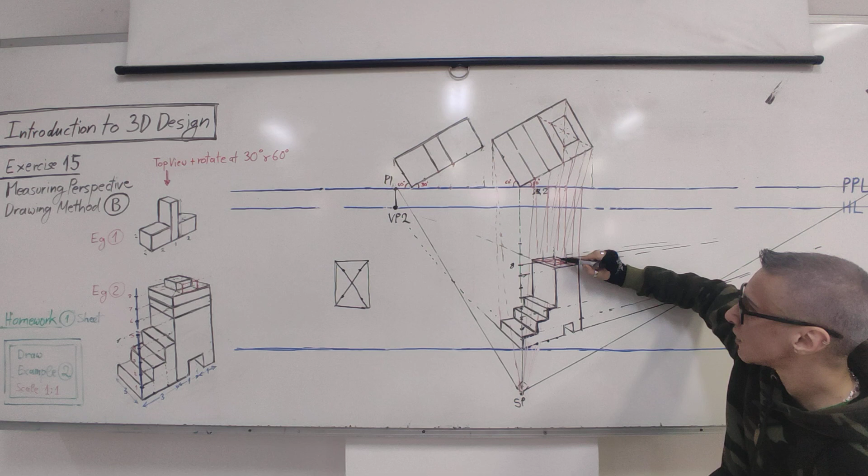So, from number 8, go to the vanishing point. If you extend this line to here, and this line to here, these 2 points, okay? Extending this line from here, which should go to the vanishing point, and this one here. What we found is these 2 here now, okay? So from this point and this point, again, we need to take to the vanishing point to find where they will intersect our lines that we need.

So from this to the vanishing point, and from this to the vanishing point, now they will intersect this line here, this line here. This is the line we want. This is the true height of the object. This is the one we found first. Then from this point and this point, we took to the vanishing point to see where they will intersect our 2 lines, okay?

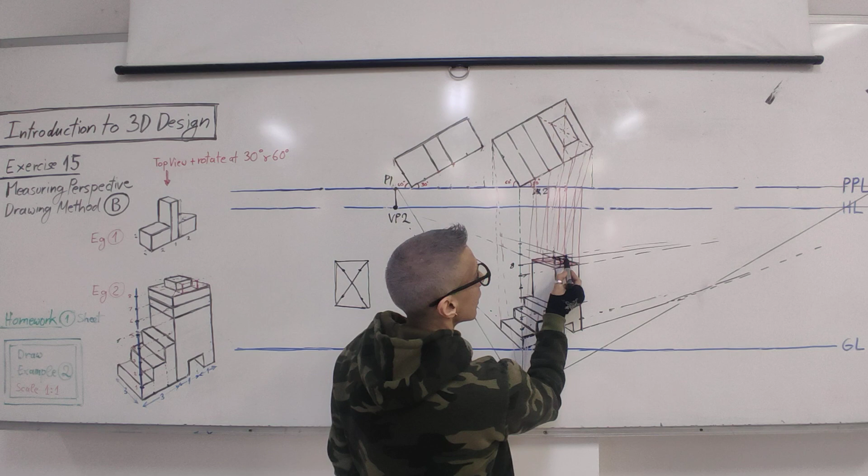Now, this line will intersect with the back line here. So then we take this to the vanishing point until it intersects the line at the back, this one here, to the vanishing point, and it's finished. So this is our object here. Just remember the 2-step process, because if you directly connect it, it will look shorter. And many of you did that in the exam or in the drawings from what I see. So this is very important to correct.

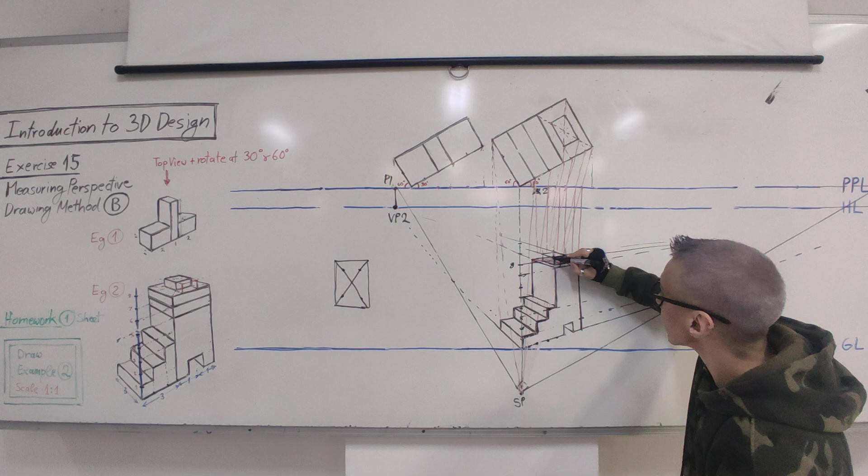Because it will come again, okay? It will come in the next exam again. You will have to have heights to find, okay? You need to learn. So this is our object. It's completed. Now, for your homework, you need to draw this object. Exactly, with these measurements, scale 1 to 1. What I did here, you have to do.

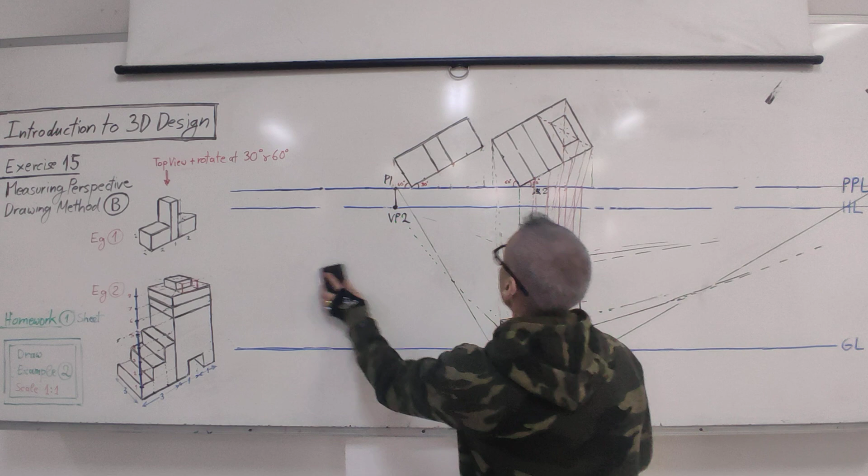The top view is ready for you. I made it ready, okay? But if you have problems with understanding how to draw top views, you need to also practice that, okay? So draw, for example, this simple object as a practice. Draw something you want to draw. Put some cubes together. Understand the method first. Get the hang of the construction, how to draw correctly. Then move on to this object, okay?

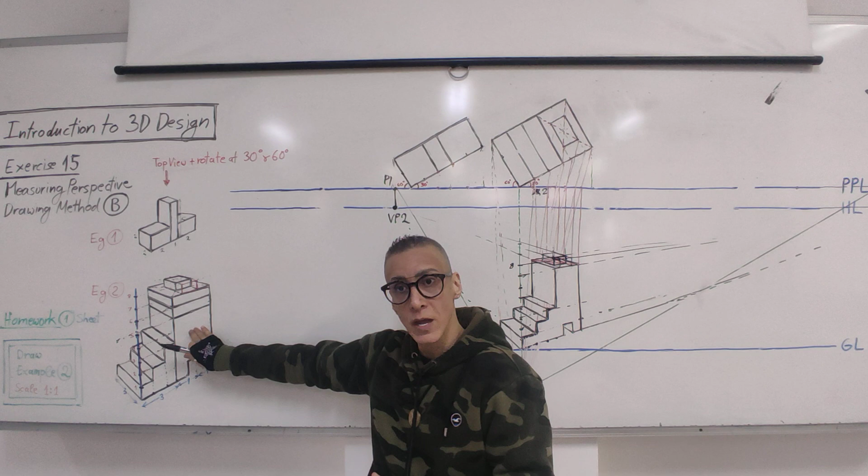After that, once you are able to do this, you can draw anything. You can draw houses, interiors, everything. The same method, very simple to apply. But be accurate, use the rulers correctly, and this is basically it, okay? And be careful of the heights. Any height that is not directly above this line or directly above this line, you need additional steps to find it. Not directly connect with the first edge, okay? Remember this.

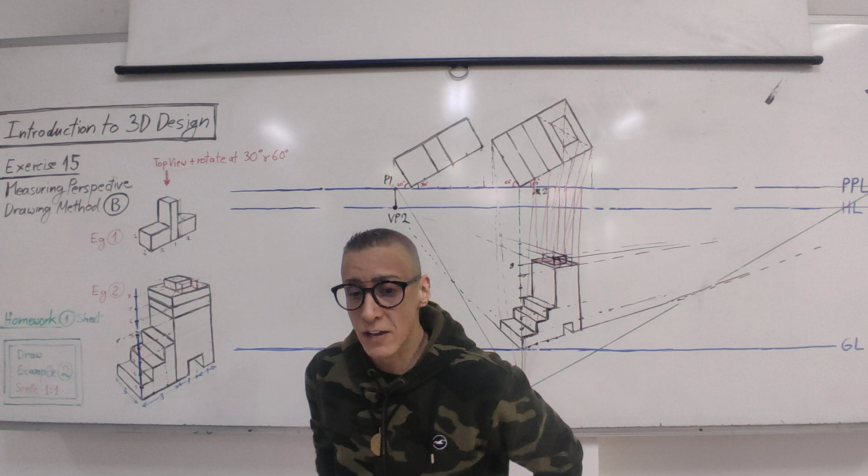And I gave several examples during the classes, and it's recorded on the video, so watch again. Anyone who is lazy, in the end the marks will also be extremely bad. So this you need to draw for your homework, but in reality you need to draw maybe 10, 20 other drawings to really understand the method. Because you need to also experiment.

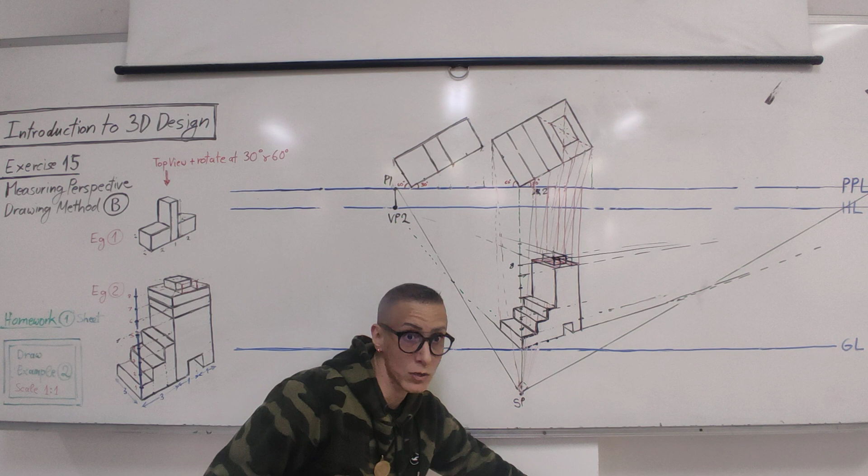What will happen if we put the ground line up here? What will happen if we put the horizon line down here? What will happen if we put the ground line down here, for example? What happens to the drawing? What if? You need to actually draw to understand it. I cannot draw for you all the possible situations. Okay? So this is it for this exercise.